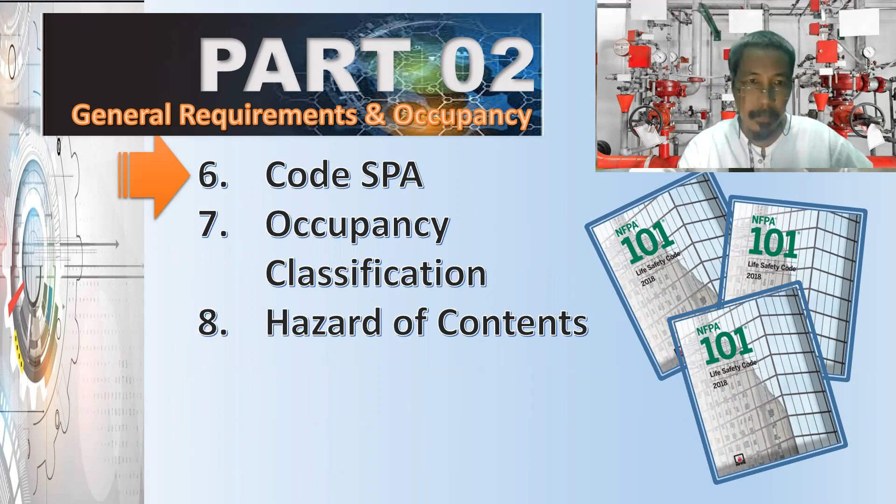There are three major topics in this part 2 about general requirements: Code SPA, Occupancy Classification, and Hazards of Contents. In this particular module, we are in Code SPA, under which we have scope, purpose, application - the words with the acronym SPA. Last module, we already discussed the concept of equivalency. In this module, we will tackle the general code provisions.

What are the general code provisions? Chapter 4 contains general code provisions not covered in the administrative provisions of Chapter 1. And that is the difference. So we have administration in Chapter 1, references in Chapter 2, definitions in Chapter 3, and now Chapter 4 we have general code provisions, wherein goals, objectives, and assumptions are explained along with other subtopics.

Some of these general provisions in Chapter 1 are listed here. We will go through this list in detail. As you can see, the contents of Chapter 4, aside from goals and objectives, include the existence of prescriptive and performance-based options.

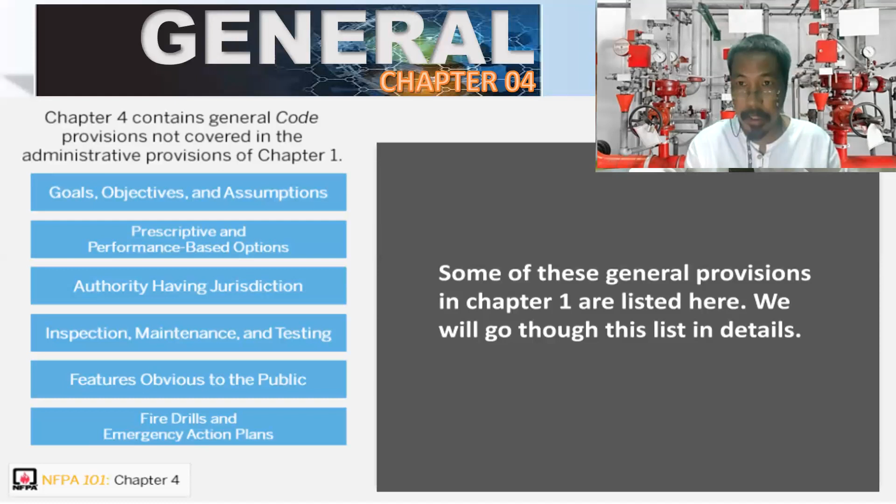If we want something to be, our system to be safe for our occupants, let us start with the goals, objectives, and assumptions.

Goals of this code is to protect occupants not intimate with the initial fire development, meaning intimate meaning in contact or within the vicinity of fire. So we should be able to immediately separate those people that are really far from the fire.

What happened if there is a fire and the panicking public are going into the fire itself, not going away or not escaping because of what? For example, confusion or panic.

So one of the goals must not let that situation happen. So we have to protect occupants, and those not intimate with it, from the cause of fire damage, injury, or fatalities.

Another one is improvement of the survivability of occupants intimate with the initial fire development. So there are two types of person that we have to take care of because we want to have safe occupants: those occupants which are not intimate, and those occupants which are intimate. Those occupants which are intimate must survive.

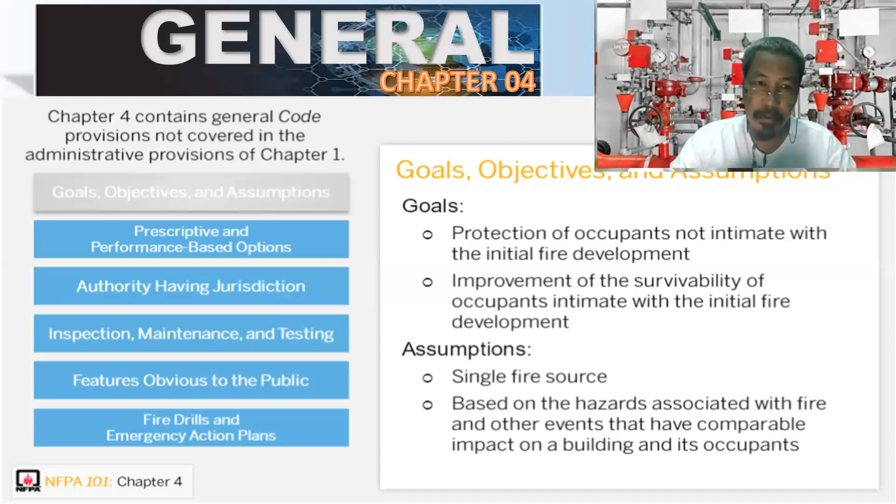And if you are dealing with prescriptive based options, you have to look into chapters 1 to 4, 6 to 11, and 43 - those are the core chapters. As we already know by now, applicable occupancy chapters are 12 to 42.

While if you are dealing with performance-based option, you can be guided by chapters 1 to 4, but performance-based option is chapter 5.

There's something wrong with this. So there's what? Cut and paste.

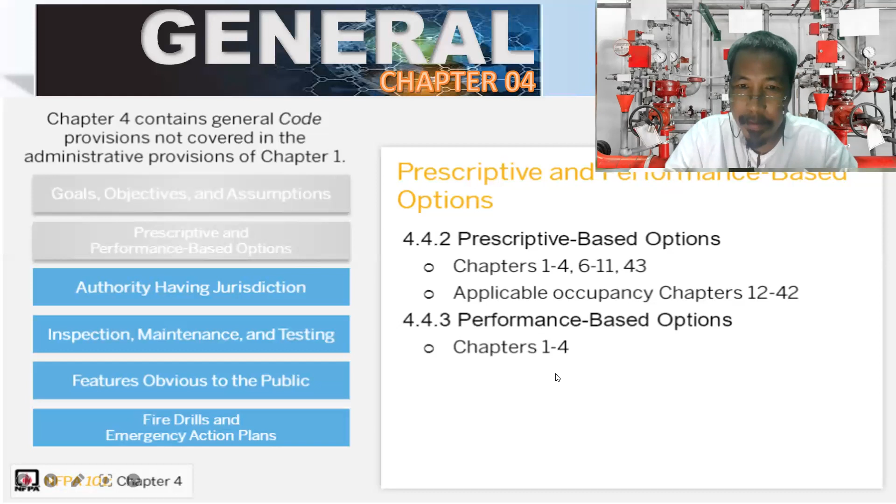So this must be chapter 5. Now, what do you mean really by authority having jurisdiction, or AHJ? It is the person or office. It can be an office, not a single person, because in our country, there are several of these persons. That's why we are collectively calling this group of persons an office of AHJ, or Office of Building Official. Okay?

There may be multiple AHJ for one project. And that is true in our country, particularly for different disciplines. AHJ for mechanical, AHJ for electrical, AHJ for civil, AHJ for structural, AHJ for building design, AHJ for sanitary, AHJ for electronics. So those are AHJ for building plans in our country.

So there are so many of these, and they are related to fire, and there is a separate law that governs the fire code in our country, different from those engineering discipline laws, specific for those mentioned engineering disciplines.

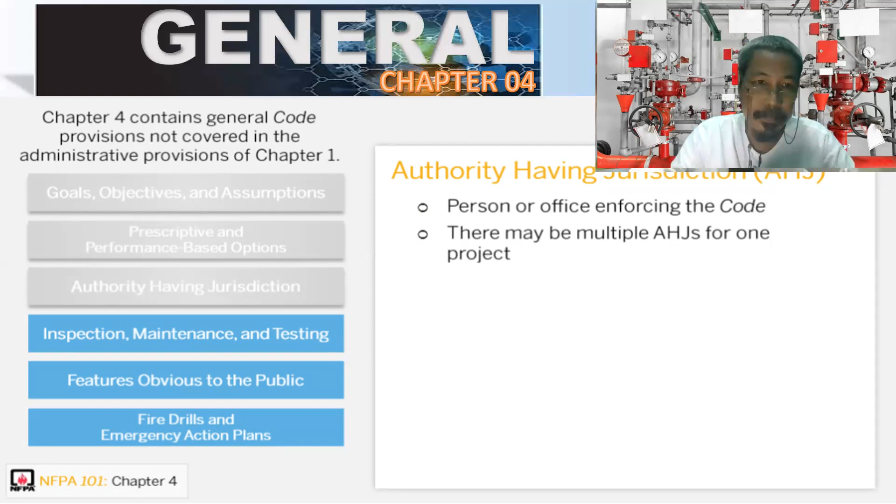Inspection, maintenance, and testing are required. All required items must be continuously maintained. After installation, there is an inspection, then we will now operate the building, and maintenance must continue. And yearly inspection is required. Yearly inspections are required.

Okay. If there are additional requirements, so that we could gauge after how many years we have to really modify our system. If our system is not answerable or is not at the right minimum degree, okay, so we have to what? To modify the fire protection system.

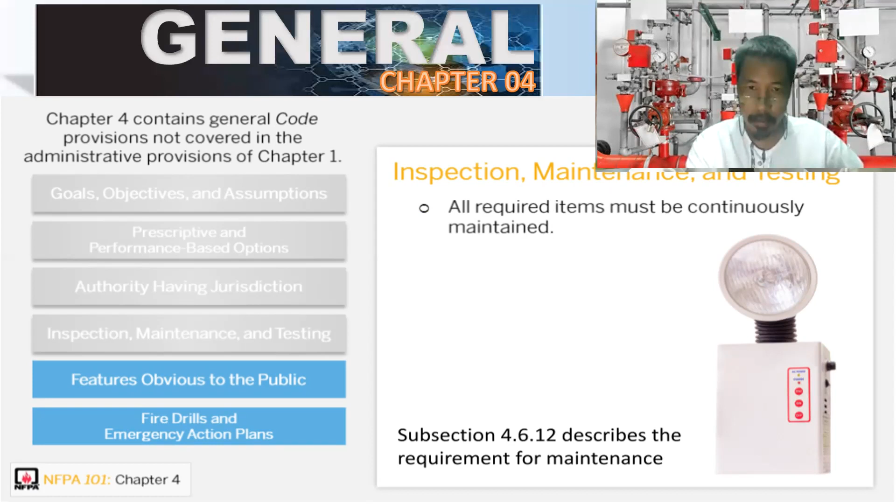And for example, subsection 4.6.12 describes the requirement for maintenance specifically. Right? Maintenance of what? For example, that one, emergency light. Okay, so in times of emergency, our power supply may trip, may be out of use. Okay, so that is a requirement.

Features obvious to the public. Those are maybe not required by code, but obvious to the public. Okay, must be maintained or removed. So there are a growing number of visitors or occupants that observe something, even though they are not particularly written in the code and not required by the code. Okay, but the feeling of the occupants suggests that they do not have confidence using the building in that condition.

So we need to add features that would satisfy their visual impression of what is a safe place to walk in. Okay? And those features must also be maintained, and removed if they are contrary to the objective, which is to minimize damage to life. Okay?

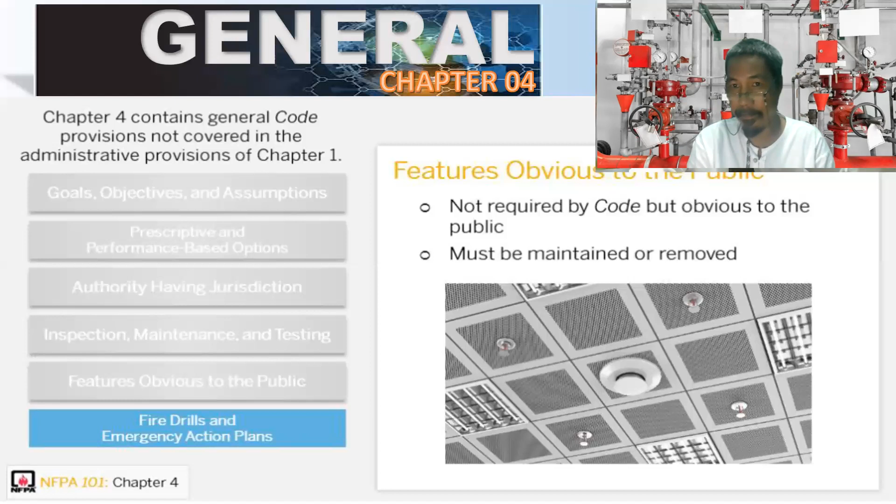Fire drills and emergency action plans. So in other countries, there are regular periodic drills that are being conducted and supervised by AHJ. Okay? These are written in the occupancy chapter. So there are different realities on the ground with respect to the occupancy type of the structure. Design in cooperation with local authorities. So it is a good idea to have a drill, emergency action plan, and design of this procedure in consultation with local authorities.

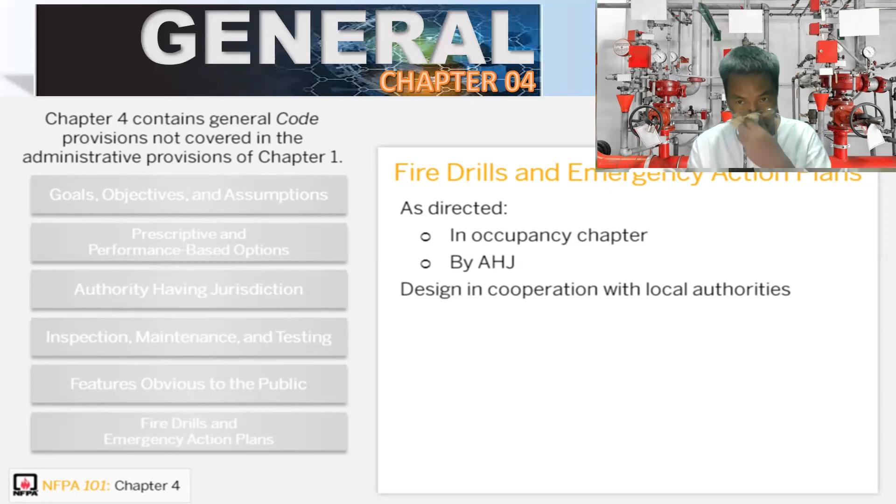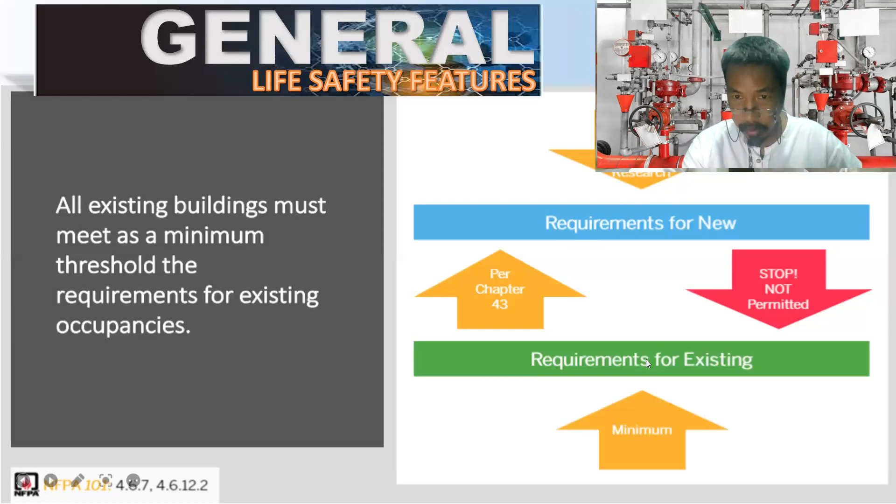For example, as I mentioned, chapter 43 is for building rehabilitation in general, which involves repair, renovation, reconstruction. Those are the 3 R's. And also modification, change of use, change of occupancy, and addition. So there are how many? There are 7 types of rehabilitation work. There are categories, no? So there are 3 R's, and what are the 3 R's? Repair, renovation, reconstruction. We have modification, change of use, change of occupancy, and addition.

What is repair? It is patching, restoration, or painting of materials. Very important, just painting, because paint is actually flammable. Okay, so paint could be an added fire hazard. That's why it is important and is being included and defined in this way.

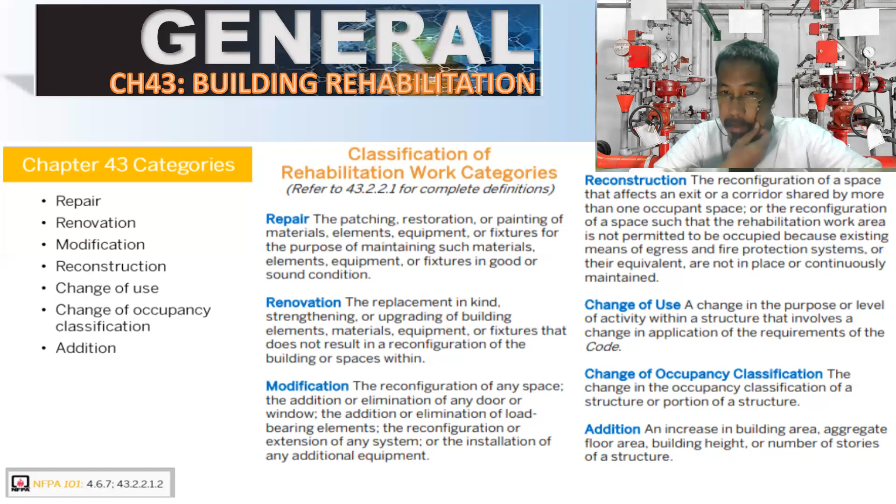Change of use. Change in the purpose or level of activity within a structure that involves change in application of the requirements of the code. How about change of occupancy classification? What is the difference between change of use and occupancy? The change in occupancy classification of a structure or portion of structure. They are different because change of use is a change in purpose or level of activity. The purpose may change within the same type of occupancy, and therefore the occupancy classification will not change. For example, level of activity, the volume of movement of occupants. That is change of use.

Addition is an increase in building area, aggregate floor area, building height, or number of stories of a structure. Addition is very easy to define. There is an additional area, space, or additional story, so a 4-story building will become a 5-story building. So that is addition of story and height to a building. This could be easily observed by the public, not just the expert.